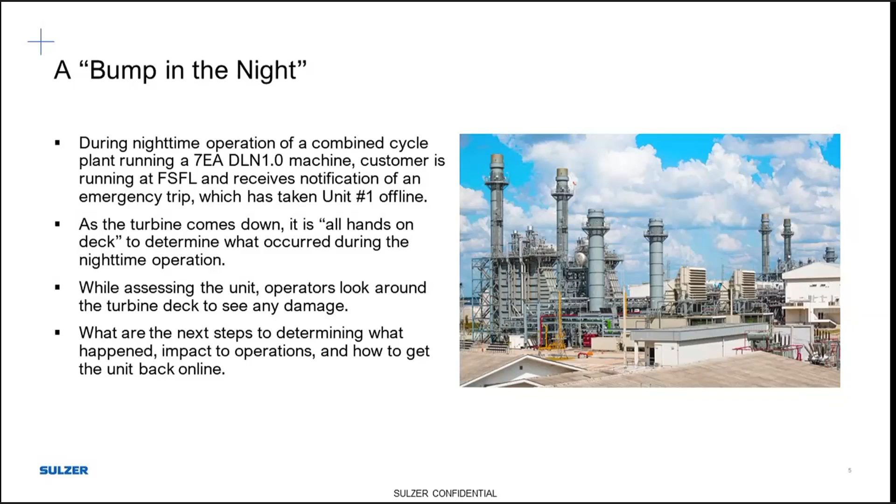So our first step in all of this, once we've made sure that everyone's safe and accounted for, is to take a step back and take a breath. Rising stress levels are not going to bring this situation to a close any sooner. The worst has already happened.

Now we need to get into assessing the condition of the unit. Since there was no readily available damage that we could see from the turbine deck, our first step is opening up the unit's borescope hole points and getting in with a borescope. While borescoping the unit, it's noted that there is heavy compressor damage seen around the 5th stage, with collateral damage to the aft stages of the compressor.

At this time, management is making a decision to contract a field service company to perform a more thorough tops-off inspection.

We discussed the steps forward from this point of plant and asset management reaching out to a field service company, but obviously there are several steps that occur between the event and this point. There will be initial meetings and calls after the unit comes down to distribute information to the applicable teams, plant management and asset management in most cases. In the case of a utility, dispatchers will need to be informed that the unit is out of commission.

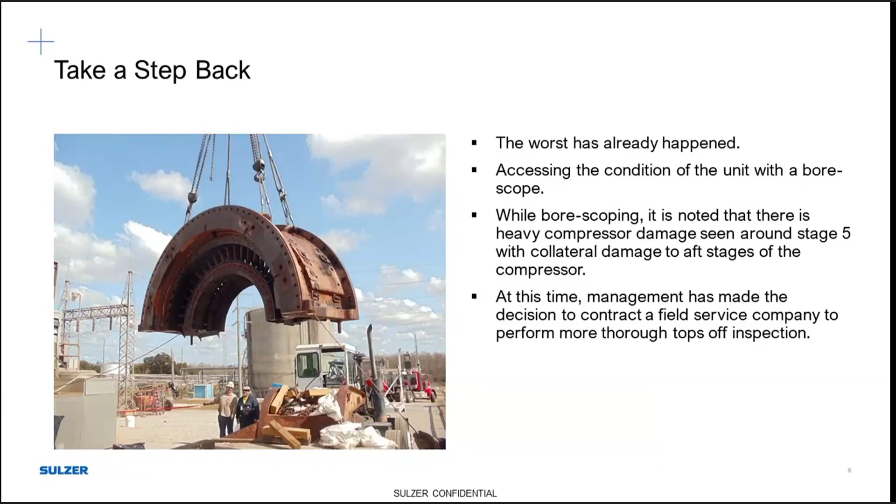We'll start that after the decision has been made to move forward with the field service company, with the mobilization of the field services crews. These crews arrive on site, and as previously discussed, we know that there's going to be heavy compressor damage on this unit.

So with the field service crews, rotor stands will also be arriving on site at the same time. Initial meetings over what has happened up to that point will take place. JHAs and lift plans will be discussed and approved between site personnel and project management, and site supervision of outage services or field services crews.

The doghouse will be removed to access the turbine deck. Crews remove horizontal joint bolts to allow the crane to remove top half cases, and visual confirmation of a compressor wreck is observed at stage 5, with collateral damage to the aft compressor. Confirmation of the initial findings here is important, and documentation of those initial findings is imperative. The RCFA report is already opened at this point, but this is the first major item that will be addressed.

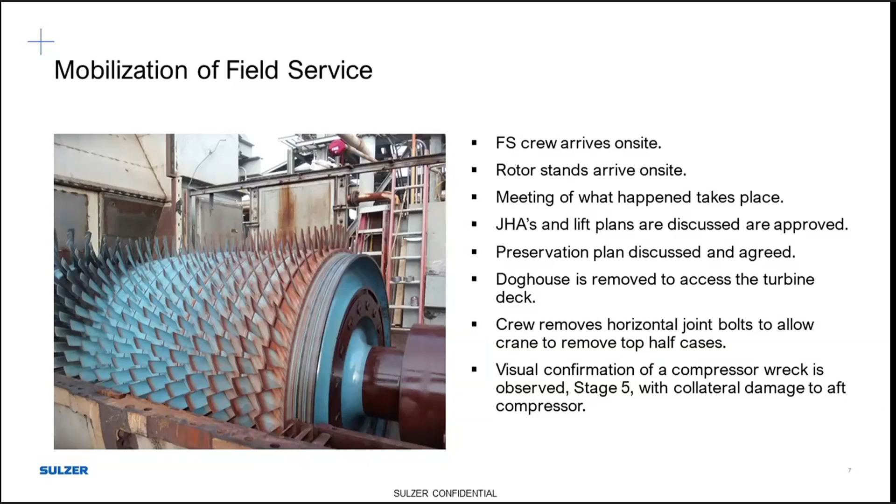At this point, preservation is key. The first objective of this outage, and any outage, is going to be safety, but the second objective of this particular outage, being that it was forced, is an RCFA.

At the moment that the compressor wreck is observed, preservation mode must be in place. FME covers are in place. We'll be protecting all potential crack initiation sites and any other damaged surfaces on both the affected stators and rotating assemblies. The lift plan will be reviewed, and we'll start removing the rotors from the cases at this point and set the rotors off to the side on rotor stands. And with the rotor out of the way, these RCFA procedures can begin.

The work provided here will decide the outcome of the RCFA in the long run. Maintaining crack surfaces can preserve chemical property makeups found on propagation sites. Ensuring a good plan is in place with the outage service team, supervisors on site, the site crew, engineering staff, and project manager, and then ensuring that these plans are adhered to throughout the project. This is where we're going to be able to determine the cause of this outage, and this is going to be absolutely imperative moving forward.

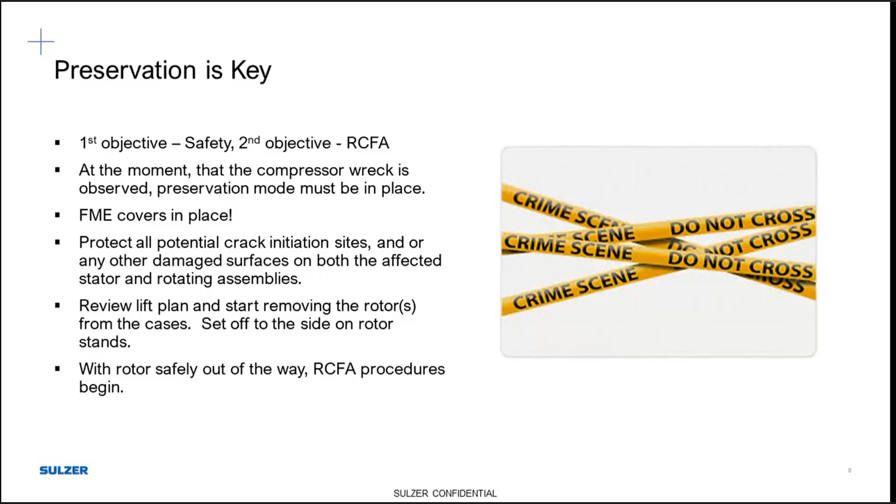Once the unit is opened, the condition is assessed, the procedures are in place, and we've started with preservation of the unit, we're going to move into the next steps. On-site activities and off-site activities will both begin at this point. We'll be loading up the unit rotor and all components as they come out of the hot gas path and combustion sections onto trucks to be moved to off-site activities. And during that same time, on-site activities will move forward as well.

So data gathering from the unit and operation, and identifying highest probability factors or failure indications, will begin on-site. The field service crew will start a major inspection, including pulling the remaining hot gas path and CI components. Those components will then be sent to a shop, as I discussed, with the rotor, and compressor case cleanup can start taking place as identification activities wrap up. This will also include going through to make sure that there is no foreign material throughout the air cooling systems within this gas turbine.

Off-site activities: the rotors will arrive at a shop, the components arrive at a shop for shop evaluations. Engineering will give an initial assessment of the condition of the rotors and the components, and then engineering will work with the field crews and project management to identify material for the RCFA. The RCFA is started in a materials lab with material replicas, fracture surface review, and other items.

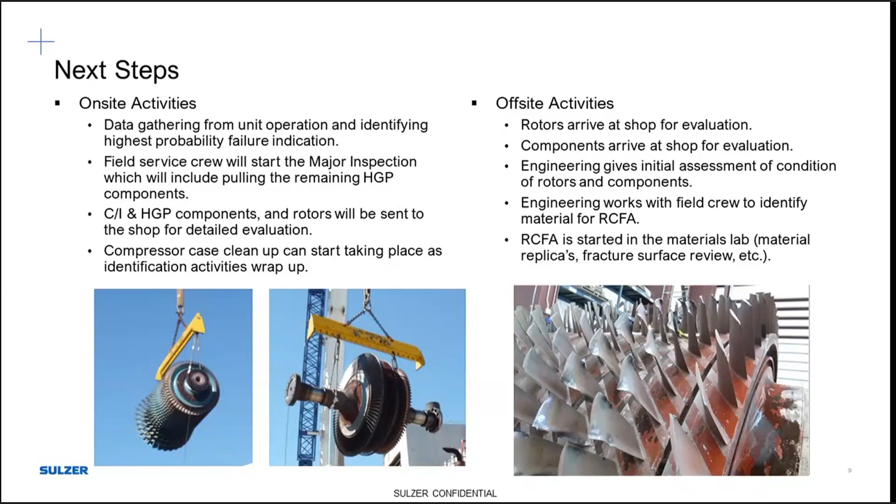So we'll move into the off-site activities. The first step is rotors and components arrive at a repair facility.

So anyhow, let's get back to off-site activities. Prior to the rotor arriving to the facility, field service TDs and their project managers will have alerted the shop as to the type of damage to expect. As soon as the rotor is offloaded and safely onto stands, engineering should ensure that the fracture surfaces are still protected. At that point, they'll release the rotor to operations to start the as-received rotor inspections.

So in this picture, it shows a coupled 7FA, which happens every once in a while, but at this point we're going to do a thorough visual inspection. We're going to go ahead, set it up in V-blocks or in a balance machine and go through runouts, check balance. After the check balance is approved, we'll go to grit blast and NDE.

While the rotor is going through the as-received inspections, engineering is going to continue out the RCFA process. The fracture surfaces are going to be examined, and it is noted with the failure occurring at stage 5, the compressor rotor will need an unstack.

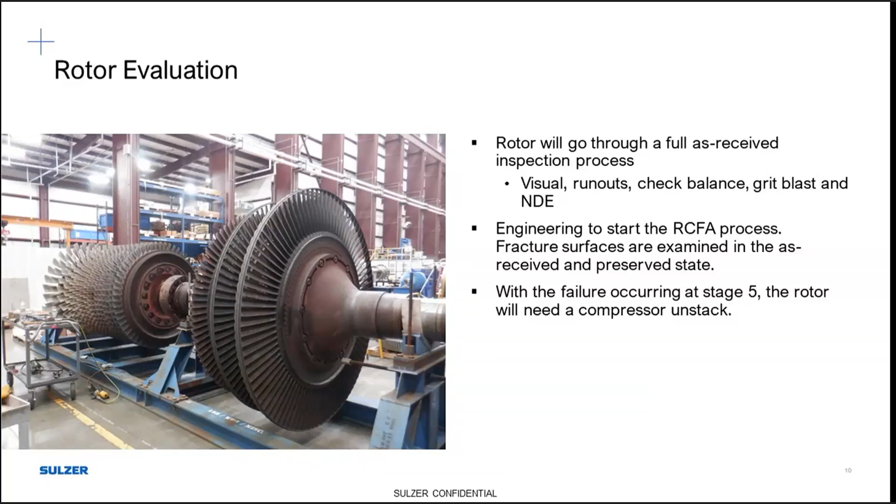Going through the next several slides, we're going to have compressor and turbine sections split up. Compressor is always going to be on the left-hand side of the slide, turbine on the right.

During the detailed rotor inspections, compressor blade damage was noted, which warrants a compressor rotor unstack. During unstacking of the compressor rotor, we noticed galling of 7 rabbet fits that will need to be addressed during the repair phase. We also noticed internal web corrosion that will need to be addressed with an appropriate coating.

Also, while inspecting the turbine section, borescope inspections down into the coolant slots exhibited similar corrosion attack as the compressor side.

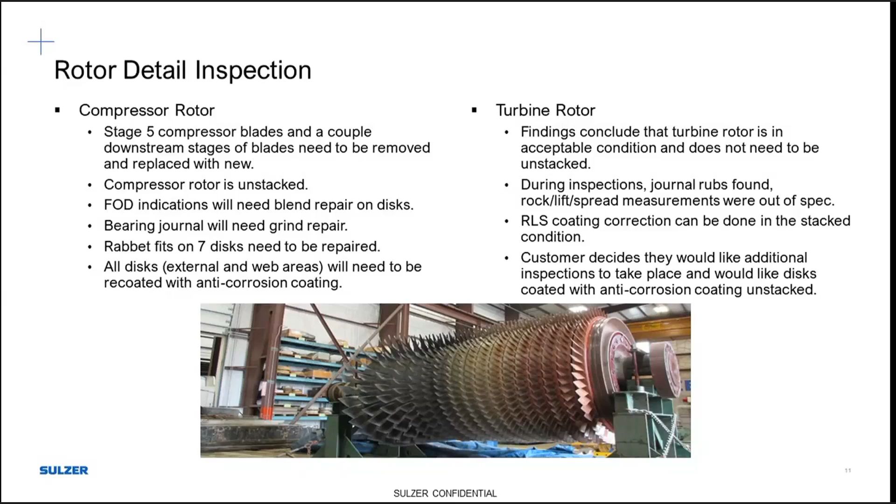So as we can see in the photos above, compressor blades were identified during the visual inspection to show FOD and were tagged.

Compressor rotor unstack process is going to start by unstretching the compressor through bolts. When all the through bolts are unstretched, the bolting can then be removed and we can start the unstacking process for the compressor discs.

Similarly, on the right-hand side, on the turbine section, turbine bolts will need to be unstretched, then the turbine section can be unstacked. We'll then perform further visual inspections, NDE inspections, dimensional and runout inspections on the disc, as well as inspections on the fasteners, and make recommendation for reuse.

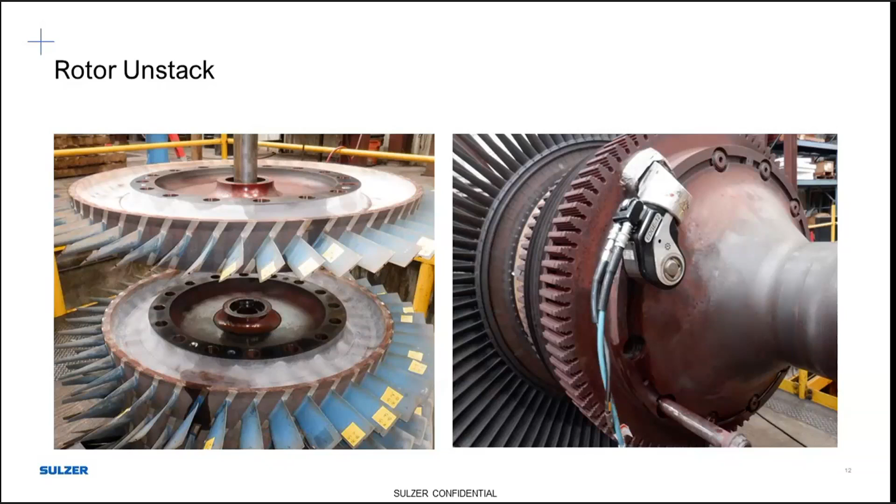So the first step after all the as-received inspections have been completed, findings are to be addressed with the client. A path forward for the repair processes is agreed upon.

At this time, engineering has performed material replicas of multiple fracture surfaces, has analyzed the operational history that was given to us by the client, and has preliminary results for the RCFA.

This is where keeping an open channel of communication is key with this large of a project and so many fluid items. A single point of contact in a project manager is an occasionally underutilized position. Whether this project manager is a single point of contact within the single company for all scopes of work, or this is an external owner's engineer supporting the site to keep multiple companies' updates in order.

This is a critical position from a high level and can work as a sounding board for discussions and results or paths forward with site personnel. Again, highly recommended.

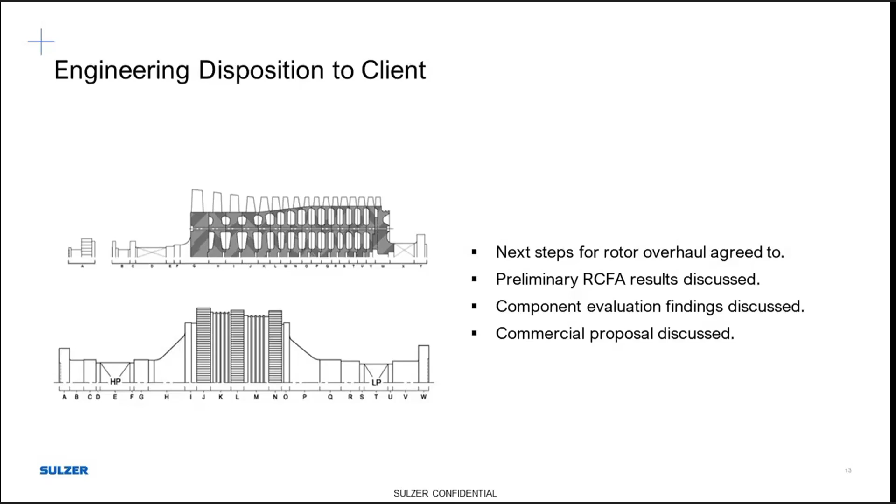So at this point, the client and the repair facility have agreed upon a path forward to overhaul the rotors.

Individual bladed discs have had an anti-corrosion coating applied, and forward and aft coupling faces have had runout corrections completed.

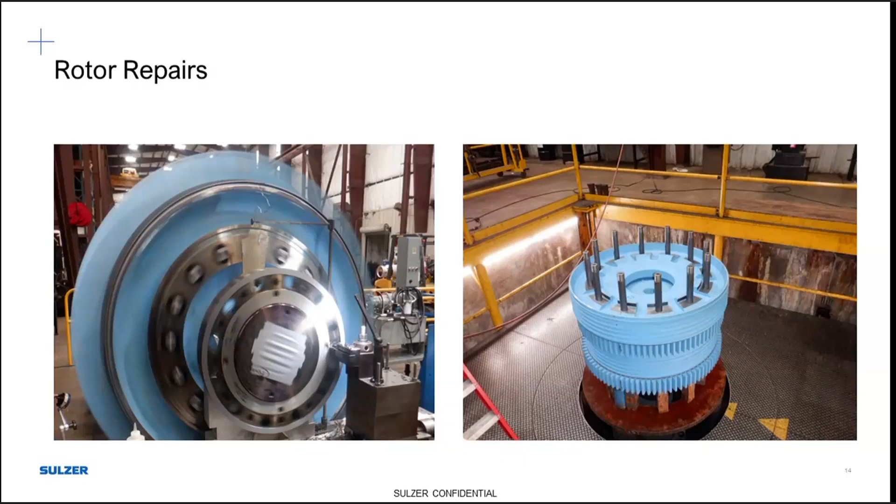So getting in a little on the anti-corrosion coating. Sulzer's got a nomenclature - it's A for air spray, but this coating is an anti-corrosion coating that can be applied to the turbine or compressor side. It's an aluminum chromate phosphate coating, which works as a cathodic protection against the base material.

So simply put, the base coat acts as an aluminum reservoir for the cathodic protection. The base coat is the active coating, and the blue coating that you see in several of these pictures is an inorganic sealer top coat.

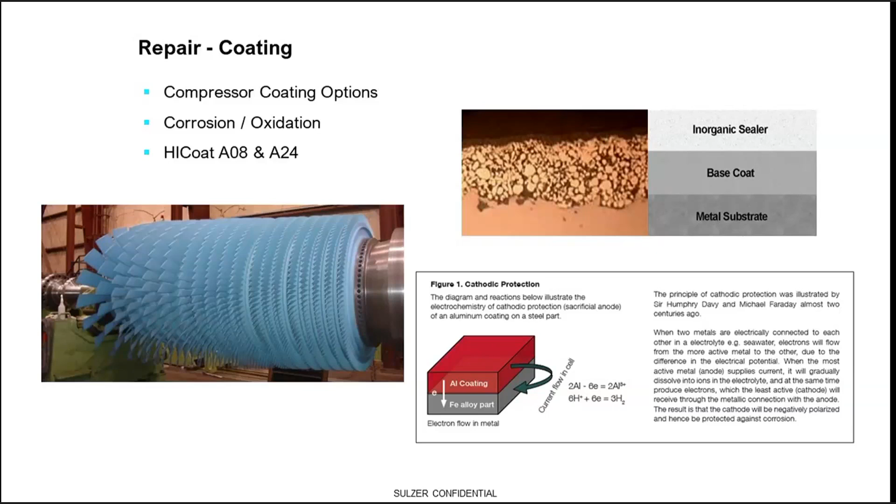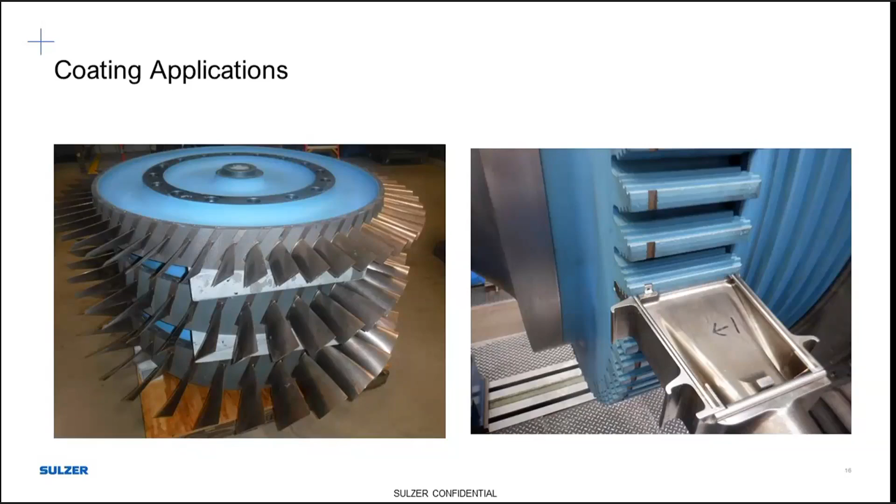Similarly, compressor discs on the left-hand side. These discs had the web areas coated with the anti-corrosion coating; however, they did not have the blades coated. For this picture purpose, these are Carpenter 450 blades. On the right-hand side, there is a first stage turbine bucket being slid into a rock lift spread corrected turbine disc, and they're doing rock lift checks to ensure that the coating applied meets the criteria needed.

Do you want to answer a question real quick that just came up? Yeah, go ahead. Stephen asked a question: have the coatings been analyzed for water wash deposits to avoid additional material disposal costs? Stephen, can I take that question offline for you? That could be a lengthy explanation. You got it. Appreciate it.

So we're going to take a pause here and talk about how important it can be keeping components on hand that can be considered consumables, and how imperative it is to these rotor projects. With metal market fluctuations that we're all currently seeing and the possibility for long lead times, a shop having the foresight to keep these items in inventory can keep projects on track when abnormal findings occur.

For example of how this could look, Sulzer tends to keep many common bolting inserts and other requirements for multiple units and multiple makes and manufacturers—GE, Siemens, Westinghouse, Legacy, or F-Tech—in-house. Having on-site manufacturing capabilities can also give the power operator a leg up in the case of an unplanned outage. Whether or not the replacement blades for your specific make and model of turbine are on the shelf, a plan can quickly be implemented to start machining compressor blades and keep the ball moving forward.

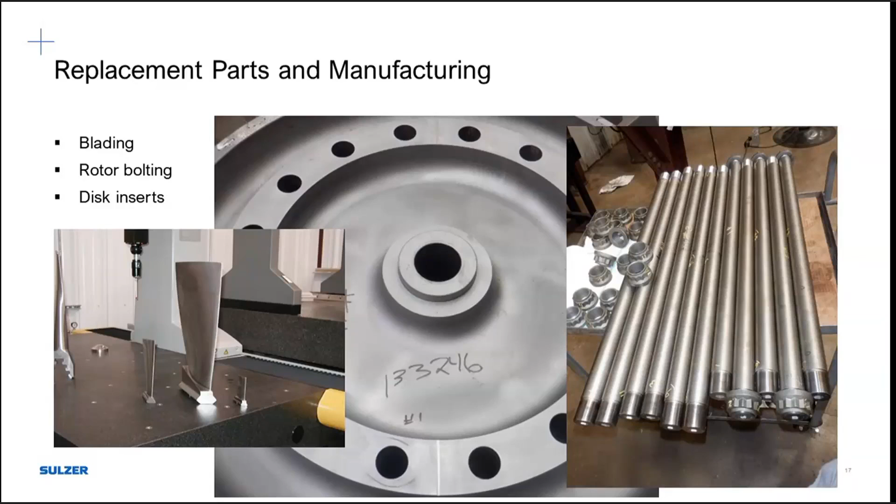So now we're going to start bringing off-site activities back together. After the recommended repairs and coatings have been completed, we'll now start the rotor stack process.

Prior to the stacking, Sulzer performs individual disc balancing. This is done on a tabletop single plane balance machine. This operation helps eliminate excess balance weights during the unit rotor balance. Compressor disc mating faces will be honed prior to the stack, and in this case we reuse the compressor through bolts because they pass dimensional and NDT criteria.

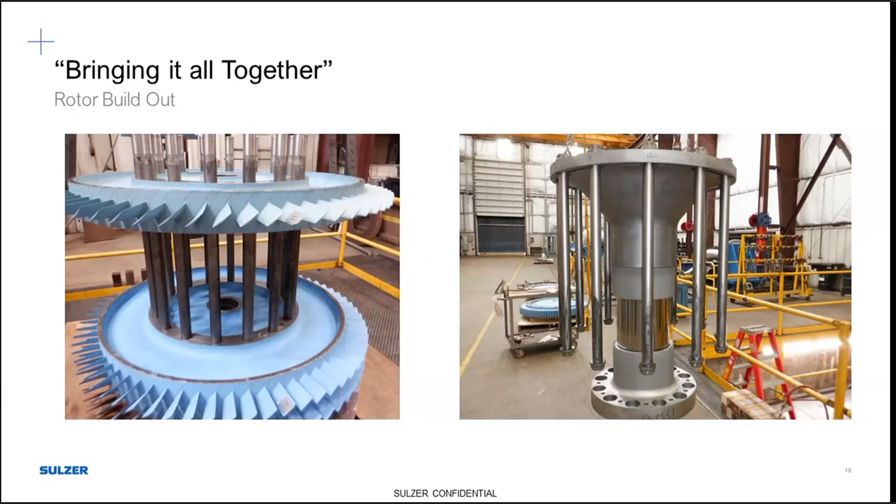Once the rotors have been stacked, Sulzer will start the stretch process on the compressor and turbine rotors. We utilize a progressive stretching process for these rotors. Once stretch is complete, the rotors will be removed from the stack pit. On the compressor side, left-hand picture, you can see some stretch tooling—it's got a lift and mandrel on top. On the right-hand side, the turbine section is down in the stack pit, and it looks like they're flying in the third stage turbine disc with a fixture.

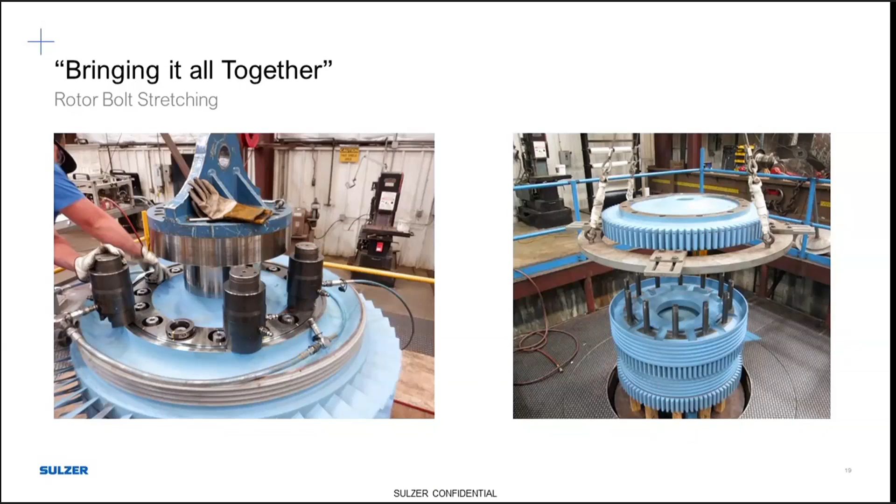Now that we've stacked and stretched the turbine and compressor rotors, it's time to check runouts and balance. A runout result that is not within specifications could indicate an improper stack or stretch, so this is an important time going through the rotor process. Also, since we performed individual disc balancing, minimal balance corrections will need to be made.

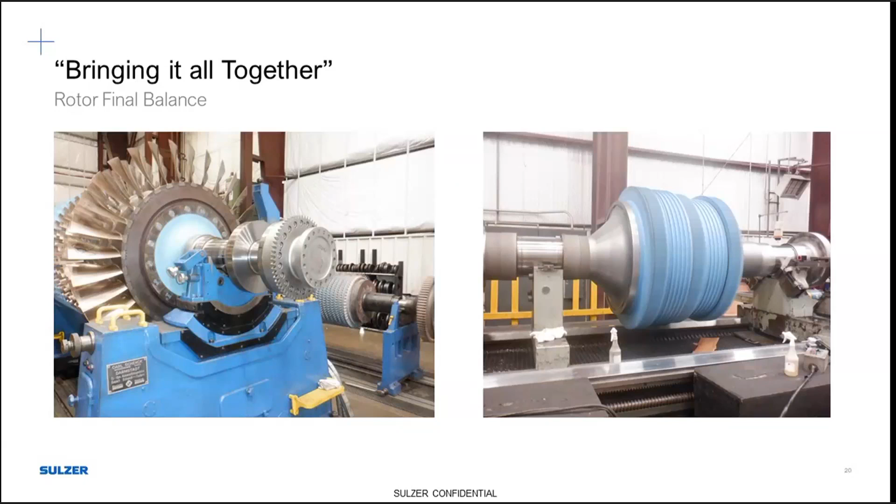So while the RCFA is going on, not only are they looking at material replicas or analyzing the operational run data, but they're doing chemical analyses to see if there's any intergranular deposits or if there were any external contributing factors to that failure mode. And then the materials engineers and the engineering group need to take that data that they've found and collected and review it against published base material properties of whatever that base material is on the failed part.

And just like we stated earlier with how important this preservation mode is on site, this is the result of that. If we can keep that preservation in mind and key early in the outage, it can support the RCFA through these material evaluations and make everyone's life just that little bit more easy when it comes to these very complicated systems and analyses.

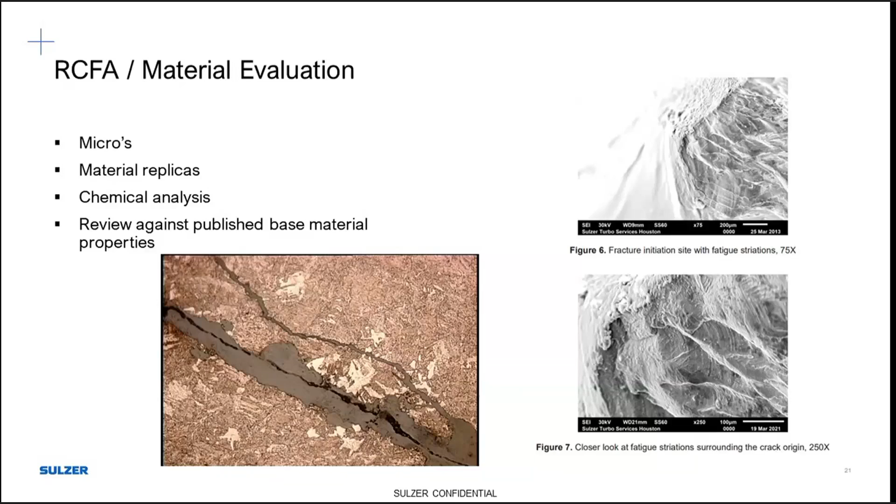So these machines will prove that the buckets or the other parts that you want to have a life assessment actually either do or do not have remaining life. And then in the right-hand picture, I hope Wayne Greaves is on because now you're famous, you can see Wayne Greaves sitting at a scanning electron microscope. Wayne is our senior metallurgist and he's been with Sulzer for, I believe, 33 years. The scanning electron microscope allows us to look at finer detail of base material, of cracks, of coating compositions, intergranular, just a really nice piece of machinery that most labs do have and should have.

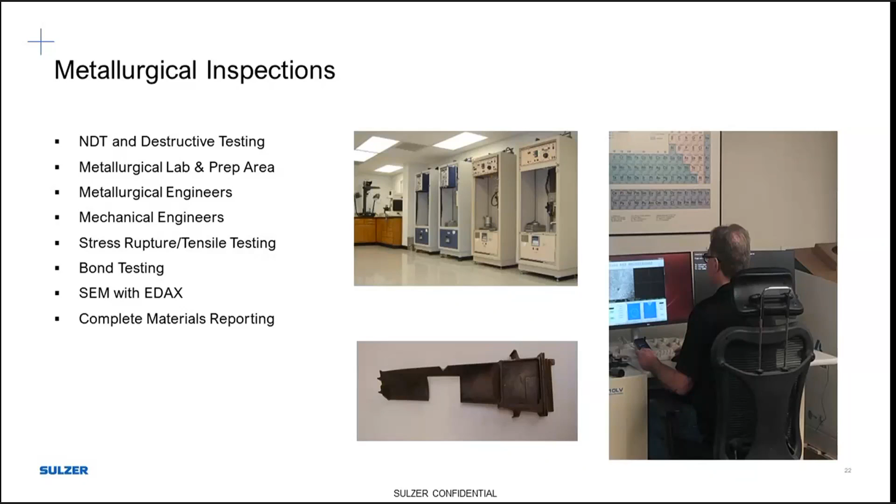So we've discussed the on-site activities. We've discussed the rotor inspection overhauls. We've also hit on the RCFAs and some coatings. So let's not forget we had the hot gas path and combustion parts that were pulled out of the forced outage unit and sent to the shop. So we'd like to go through the inspection and repair overview of what you could see at any component repair facility.

So these parts will show up into a shipping and receiving department, and photographs will be taken. They're going to record all serial numbers and part numbers. Those parts then get shipped to the specific department, whether it's combustion, blades, or nozzle departments. At that point, that department's going to perform incoming and visual inspections of the as-run components. They'll then put the parts up in fixtures, whether it's a 360, slide through, etc., and take dimensional data. After engineering approves of the incoming visual and dimensional, the parts will then go to a grit blast to remove any coatings, thermal barrier coatings, MCrAlYs, or oxidation or just general turbine nastiness.

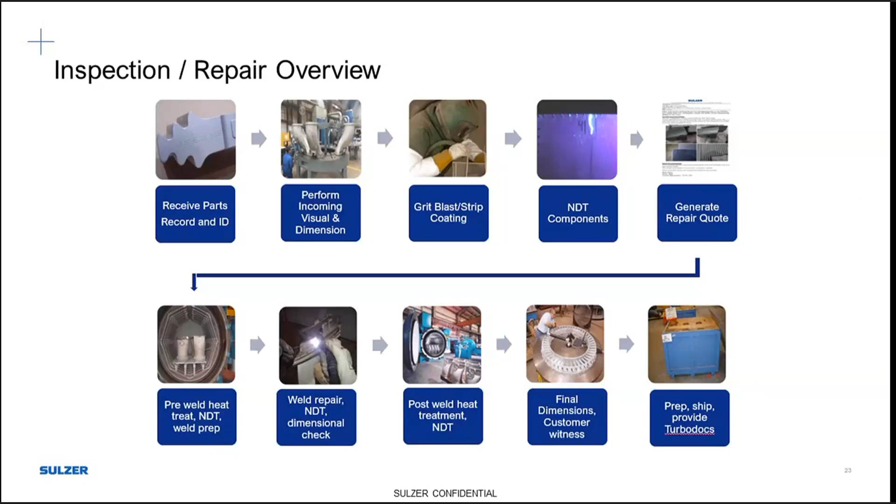So moving into a bit of a further breakdown of a component inspection and what goes into it. There's going to be multiple factors throughout this process, starting with, after mechanical grit and everything has been opened up, those NDE inspections. So visual, FPI, red dye penetrant, ultrasound, immersion ultrasound, eddy current tests will all be performed on these components. We're also going to be looking at a lot of components through a digital X-ray. The one that Sulzer has here on site is a 5-axis digital X-ray where we can take views from different planes throughout the component. If we can see a shadow in one, then we can look into it further with that 5-axis machine.

And then along with that, dimensional inspections will take place, whether it's the 360 fixtures for nozzles, the meatball, as Michael had described it, where we set up TPs in a fixture that mimics first stage nozzle or first stage vane touch points, as well as touch points with side seals, partition slide throughs for fixture checks on both nozzles and shroud blocks, and disc simulations for buckets and blades. All of these will be making sure that the components still fit next to each other and form a concentric circle when going back into the unit.

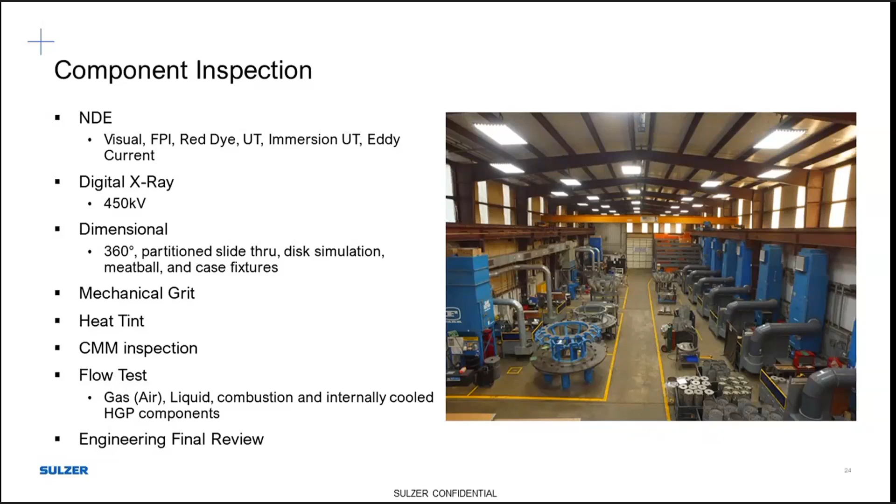Mr. Vogel's question. Is Sulzer using any white light scanning and deviation overlay comparison to new parts as part of the RCFA process? CT scan, FEA modeling to help analyze failure modes. So, Richard, yes, Sulzer does use white light overlay scanning. Sometimes we do not have scans of new OEM manufactured parts, but as we get them in the shop, we will put them in our catalog. We do quite a bit of overlays, whether it's in-process white light overlays or in-process FaroArm overlays. But yes, white light can help in the RCFA identification process. For CT and FEA modeling, we can take that offline. It could go either way.

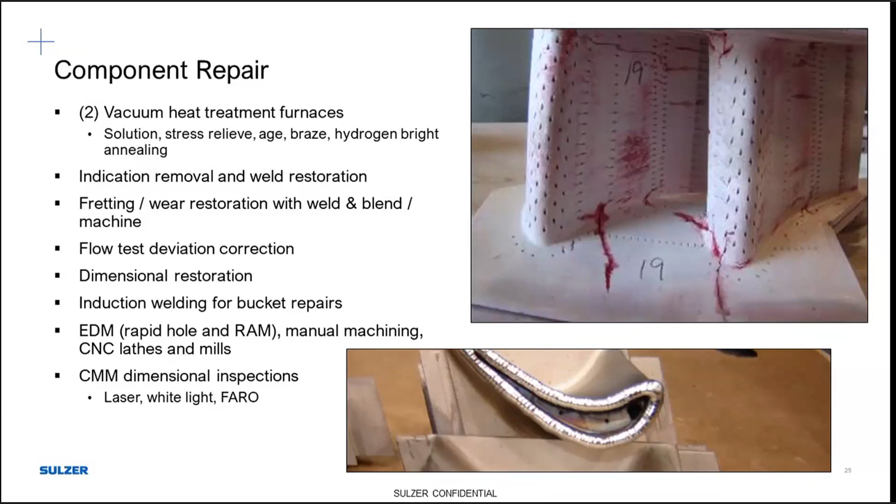So now we're through the component repairs.

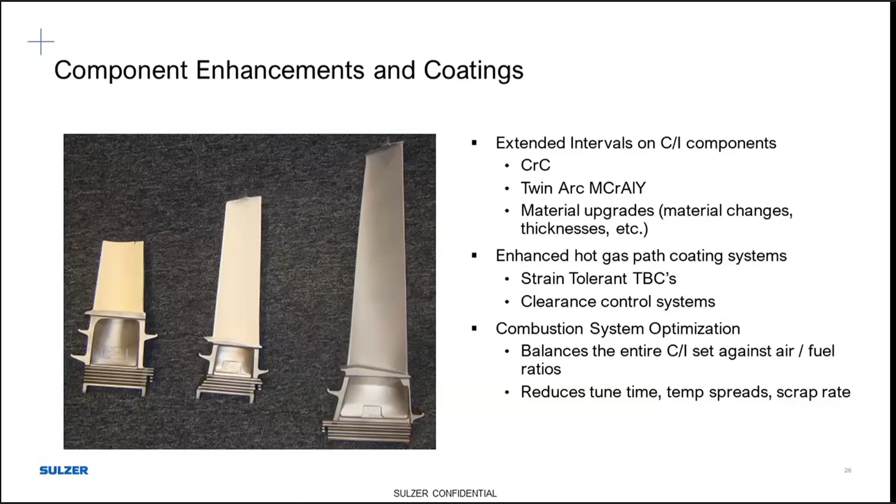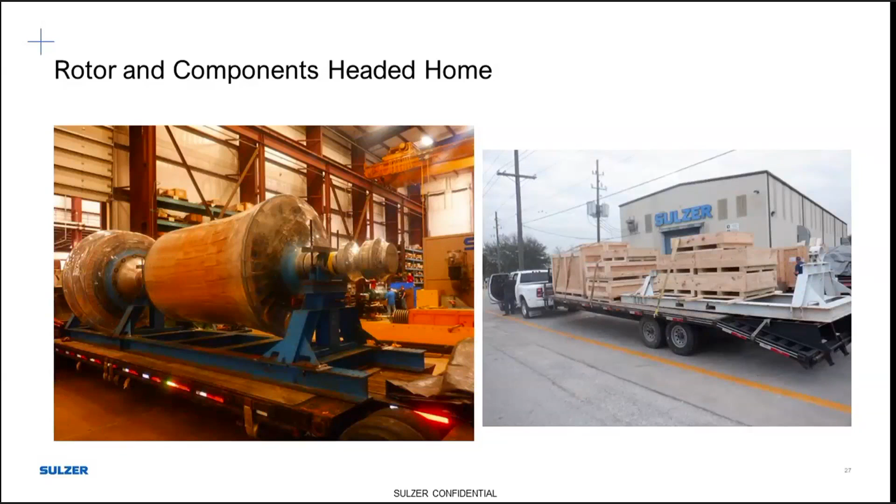So all offsite operations have been completed. Your rotor's overhauled, your components have been repaired, and it's time to send them back home and get ready to wrap up this forced outage. So now that everything has been boxed and shipped to site, we're bringing everything back together at the facility, the power plant. We're going to rebuild the unit. We're going to work on startup support and tuning support.

The site has continued to move forward in their efforts of cleaning and replacing components, stator vanes in this case, as the failure was in the stator, S5 of this rotor, and then other capital spares being replaced as well. Checking for debris and alignment has taken place while the offsite activities were going on. And now that all of this has been finished up on site and all offsite activities have been concluded, everything will start to wrap up as though it were any other planned outage.

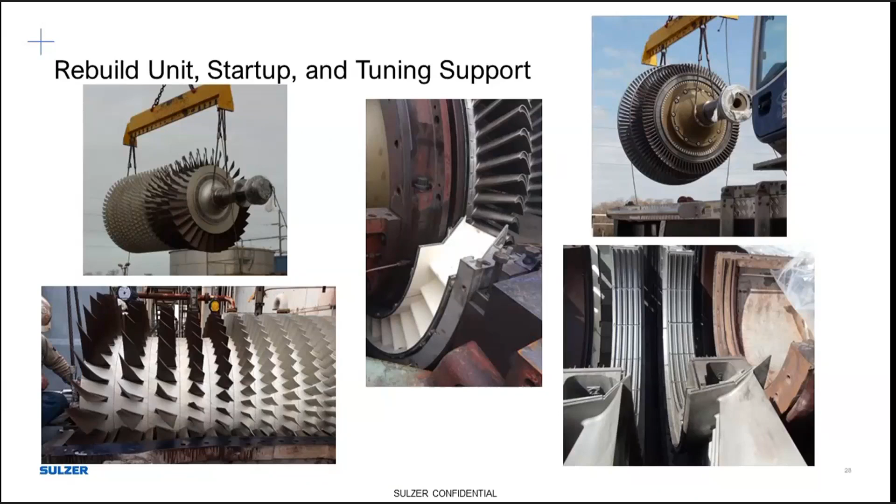So the turbine's been buttoned up. A wrap-up meeting needs to occur between the service provider and the on-site staff. And then at this time, we're going to demobilize the crews. So remember, moving forward from this, now that the turbine is back up and running, the importance of proper preventative maintenance, data tracking, parts pedigree tracking, and recommended inspections, and the proper evaluation of borescope inspections.

Preventative maintenance is key to being prepared and understanding data and trends in your unit, and allows for the ability to observe and make sense of developments and data. This is key to understanding not only what routine maintenance the unit needs per OEM documents, but the signs the unit is giving during operational intervals, and that things may be veering in the wrong direction. Understanding what data is being broadcast into the control room from the unit is paramount, but just as imperative are the borescopes of these units. This is our only look between maintenance intervals at what is really happening inside the unit.

There are some great companies out there who can provide top-rate borescope reports, OEMs and third-party vendors included, but power producers who are really staying ahead of the game are those who are taking the time to understand what that borescope report has said and what it means for the unit and continued operation before filing it away for next year's outage. Where are the cracks in my unit and which ones should I be watching? What do some of the small rubs in my compressor mean, and what could they be signaling? What do I do with the data that's been provided?